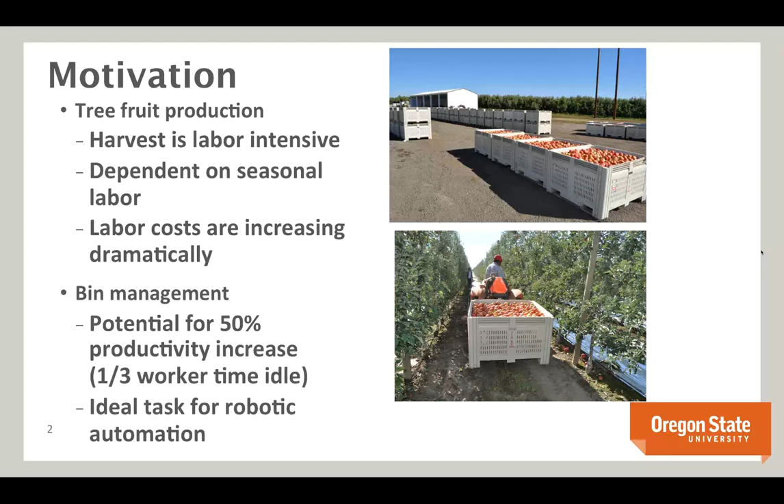So the main goal here from a robotic perspective, and so here's one of these videos that Marcel was talking about. So what we want to do is we want to develop an intelligent bin managing system that is supported by a robotic or multiple robotic self-propelled fruit bin carriers. And so this is just an initial video of the Bin-Dog platform. Let's play that again, turning into a lane.

And so here you see this is a robotic vehicle that has four wheels. It's a gas-powered engine, and I'll talk more about the hardware as we move forward. But it's carrying along this bin sort of in the middle of the vehicle. It's not like a forklift design, so it is actually a fundamentally different hardware design than the kind of stuff that you see in the orchards today. And it allows us to do a number of really interesting things in terms of modifying the way that we do bin management.

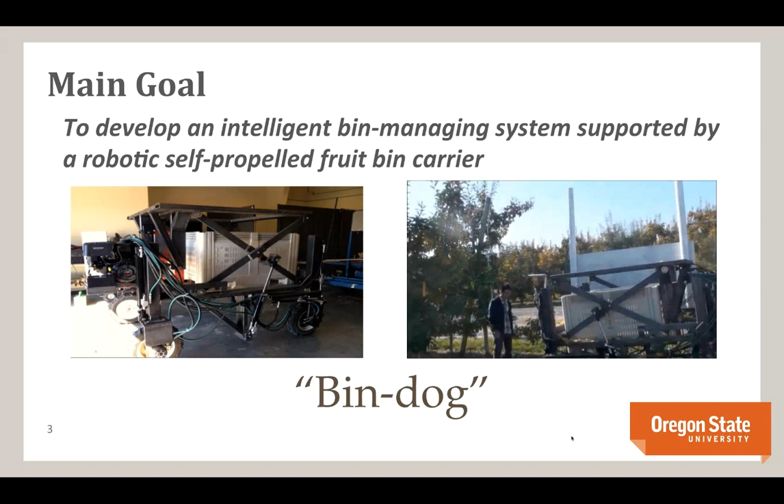And so because this is a collaborative project and this is a robotics project, the technologies that we're developing extend beyond the hardware platform. The hardware platform is very interesting and novel, but there's also more to do in order to get this system up and running and be able to take full advantage of it.

So the key technologies that we're developing are in mechanical design, so that's the platform design, but also in orchard navigation. How do we navigate in these lanes? How do we navigate in these headlands so that we can autonomously move through them and also interact with the growers in a situation where we don't want to cause any kind of danger to the growers or even add stress to the pickers' situation?

So we're looking at in-orchard navigation. We're also looking at multi-agent coordination because we want to have more than one of these bin management robots. If we have very large orchards with potentially hundreds of rows, then one bin manager is not going to be enough. And so we want to think about how do we coordinate multiple vehicles, how do we optimize these vehicles so that we can improve the efficiency of the harvest.

Also looking at human-robot interaction, as I mentioned, how do these vehicles interact with the pickers? Is there something that we can learn about different groups of pickers to try to figure out how to improve this optimization?

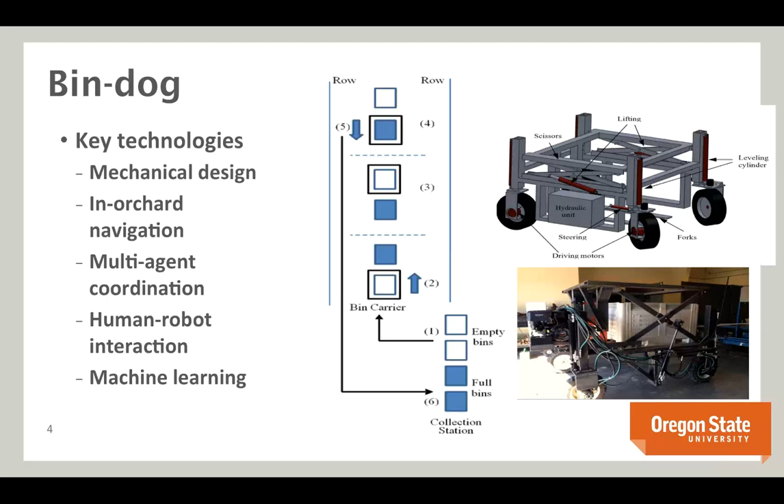So again, getting into how apple bin management is done currently. So here's the current forklift model, just to give you a bit more information about that. So the first step is the tractor will drive into a lane and place an empty bin in that lane. And then once that bin is full, it needs to drive out of that lane. Because of the forklift model, it has to drive out basically the same way that it came in. Can't go over the bin. And then it'll perhaps place some additional bins, and once a bin is full, it will come and pick that bin up and then take it back to the depot station.

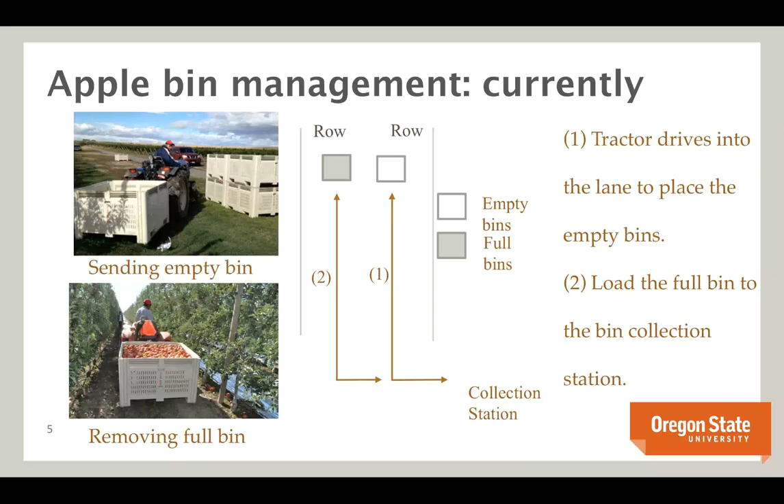And so the kind of tasks that we need to automate here with the traditional forklift tractor: we have empty bin loading, where they're at the depository and want to take some bins out into the field. Half full bin repositioning, which is an interesting one, whether we should take bins that are not full and move them to other places because maybe we've picked all of the apples at that point. And then also full bin transportation. Once the bins are full, we want to be able to take them back to the repository.

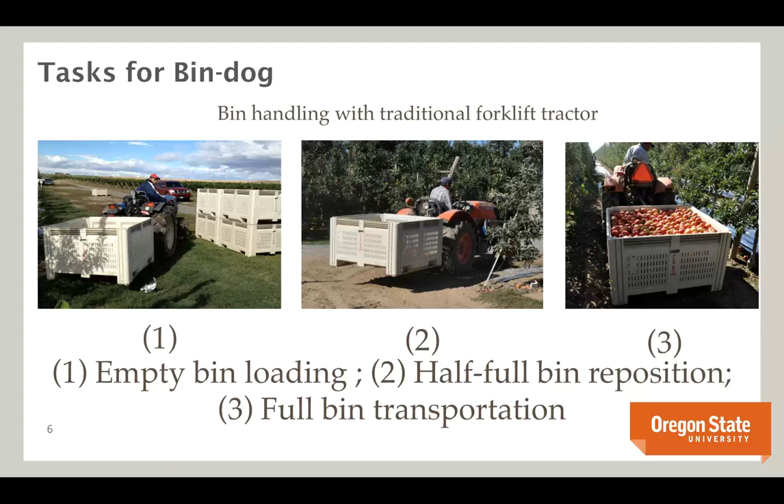So how do we do this with the Bin-Dog autonomous vehicle? Well, what we did was we designed actually sort of a fundamentally different way of doing this. And so the bin management with the Bin-Dog, rather than having this drive into the lane, put the bin down, drive out, and then come back, here the Bin-Dog is actually able to go over the bin. So it's able to drive over full or empty bins so that it doesn't necessarily have to exit the lane the same way that it came in.

So it loads an empty bin in the collection station, drives into the lane until it reaches a full bin. It can then drive over that full bin, unload the empty bin, and drive back to load the full bin. So it can do all of this at once. Basically, it can do bin replacement all in one go at the lane. So even straight off the bat, by redesigning the hardware itself, we're already able to get the possibility of additional efficiency, even without thinking about any of the multi-agent optimization or any of the additional things that we can do with this autonomous platform. So this is the basic idea.

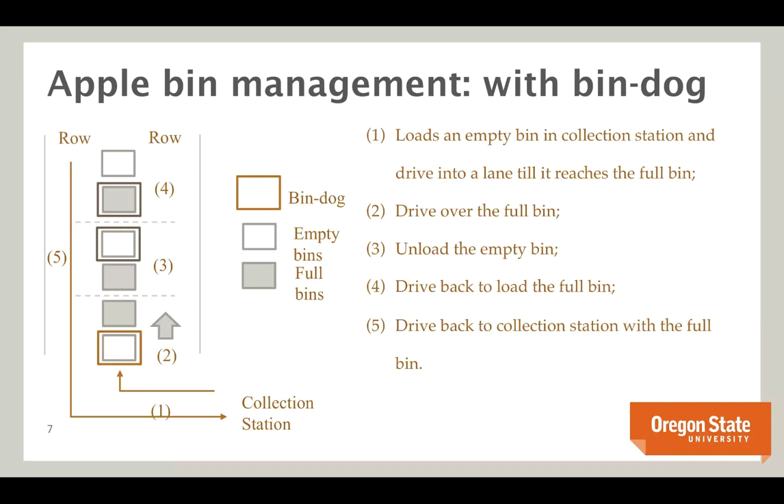And so for the rest of the talk, what I'm going to do is go through the three components of the system. And since there are three PIs, there's a very obvious split in terms of these components. So the hardware design and the system design, that's led by Qin at WSU CPAS. In-orchard navigation is led by Matt Taylor at the Washington State main campus. And then my group is focusing on the multi-agent optimization. And again, this is a highly collaborative project, so of course we have crossover between these different areas. So with that, what I'm going to do for the rest of the webinar is basically go through each of these three different sub-areas of the Bin-Dog and give you an idea of what we've developed here and what we need to move forward with in the future.

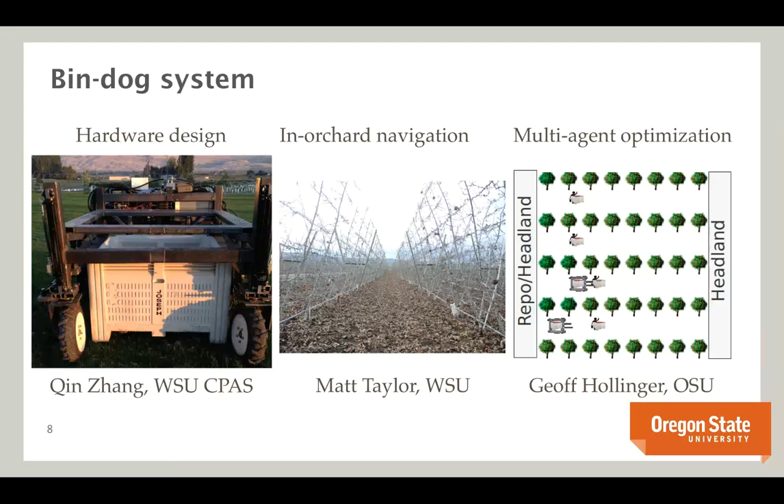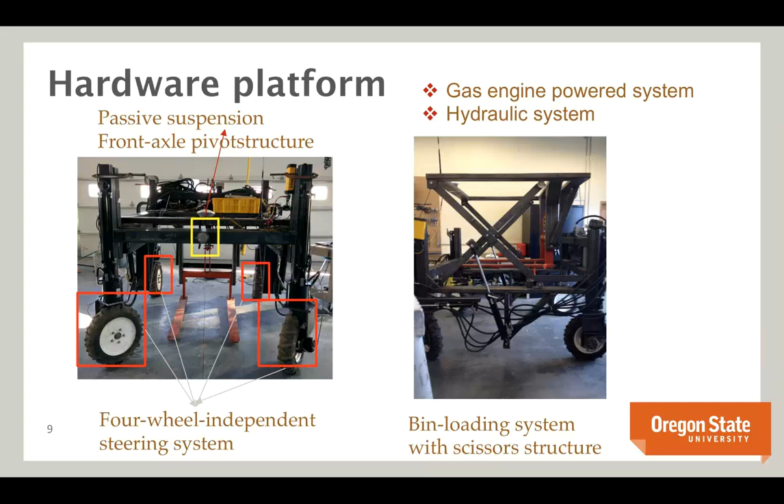This is a gas engine powered vehicle, and it has a hydraulic system for the bin lifting component, and I'll talk more about that. And so the bin loading system has this scissors structure that we'll see more of as we look at a few more videos. So here's the specifications. Basically, it's about a 2.1 meter tall vehicle, so a little bit taller than most humans. 1.5 meter track, 2 meter wheelbase, 9.6 kilowatts of engine power. So this is a fairly powerful vehicle, particularly compared to some of the ground vehicles that I've worked with in the past.

Max speed is 1.2 meters per second, which is reasonably fast. It's perhaps not as fast as a human in a tractor, but because of the advantages that we have of being able to go over the bin, we make up for a lot of that, and we also make up for a lot of that in terms of optimizing the efficiency. And there's also the possibility that we may be able to increase that maximum speed in the future.

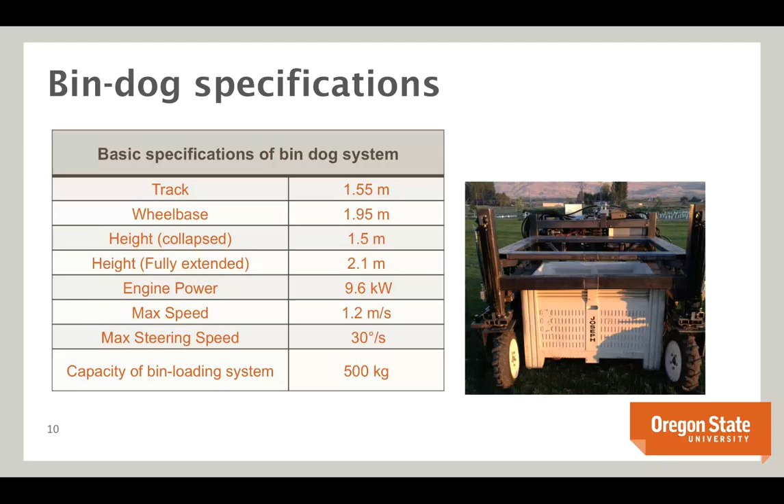Maximum steering speed, 30 degrees per second, and it can pick up a 500-kilogram bin. So these bins are heavy things, but the hydraulic system is designed to handle that. So talking a little bit more about this four-wheel independent steering system that I alluded to earlier, we have 4 different modes that we can operate in on the steering system.

We have Ackermann steering, which is what you would see from a car-like vehicle, so all of us are probably familiar with that. We also have four-wheel coordinated steering, which means that we can actually change the back wheels so that we can modify the pivot point. I'll show you a picture of that in the next slide. Crab steering, where we can actually put the wheels in different configurations, and that allows us to move almost omnidirectionally with the vehicle if we need to do so in very tight quarters.

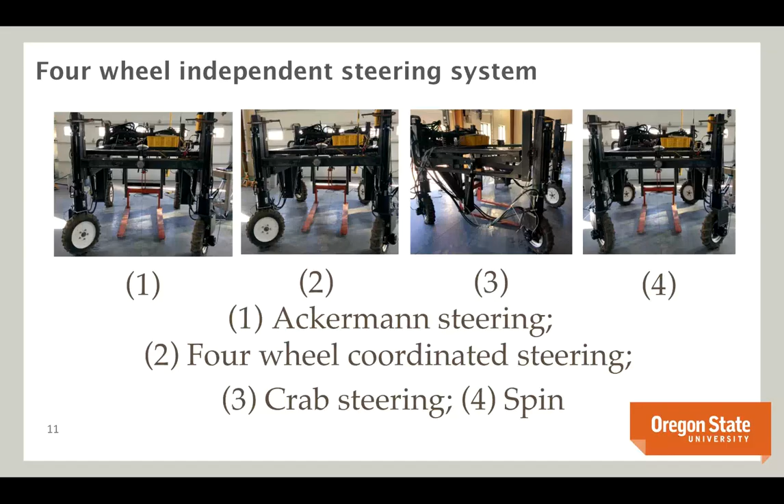And then the spin configuration, where the vehicle can spin in place and potentially reposition itself if it's in a situation that it's not able to get out of with the other steering modes. So one interesting thing here that we've really only scratched the surface on is how do you combine these steering modes intelligently in the navigation system so that you maximize your navigation efficiency, and that's something that we're looking at.

So just another visualization of these steering modes for the independent steering system. With the coordinated steering, you can see that you can position those wheels such that they pivot along that point there that is, I don't know if you can see my cursor, but right along basically to the right of the vehicle. With the spinning, obviously you can pivot around the center of the vehicle.

Ackermann steering pivots around that point that is perpendicular to the back wheels. And then with crab steering, you can really move in a number of different directions if you so desire. So this is a really interesting design here, and it really is beneficial for these orchard environments where you sometimes run into situations where you're in very close quarters.

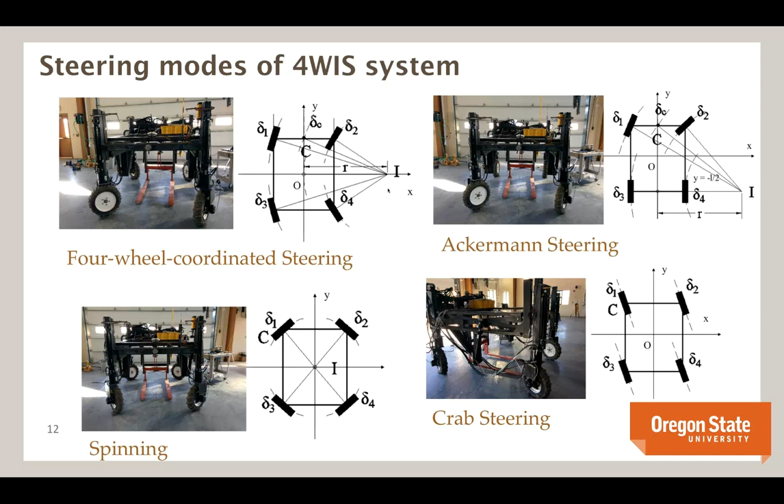So the control system for the vehicle, we allow for both manual and automatic control, so the vehicle can be joysticked by a grower or by a picker or a human operator if that's the mode that is desired. And then we're working on the automated control, and we have some results on that I'll be discussing in the second section. But essentially what the remote controller or the navigation controller do is they go into the same coordinate control system that then feeds into a fairly traditional PID controller on the wheel encoders.

And so we have integrated the laser scanner and IMU and GPS technology into this navigation system, and that basically goes into the estimation portion. But that is at a different level, which I'll show the diagram later, than this coordinated control system, which basically allows us for both manual and automatic operation, which is something that was definitely a priority when we were designing the vehicle. So let's take a look at a field test here.

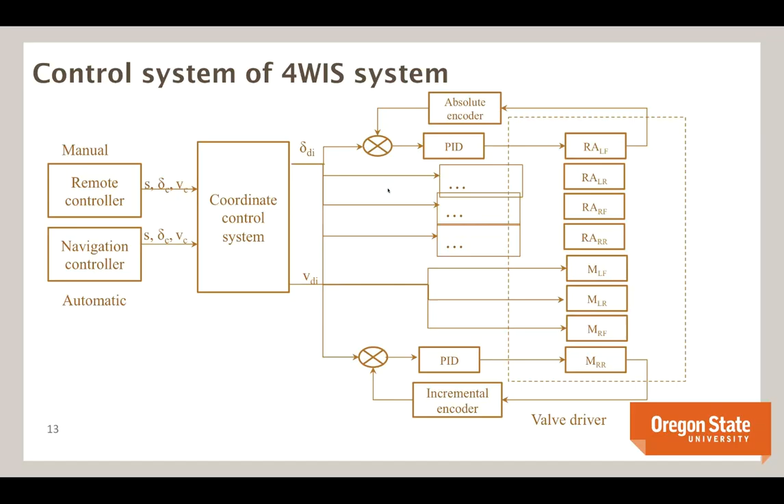And so I'll play this video a couple times since it moves through things fairly quickly. But so here we have spinning mode. It's now entering the lane. This is all under manual control. And you can see how the vehicle is able to enter the lane, drive over a bin, then move to the other bin, place that bin down, and then load.

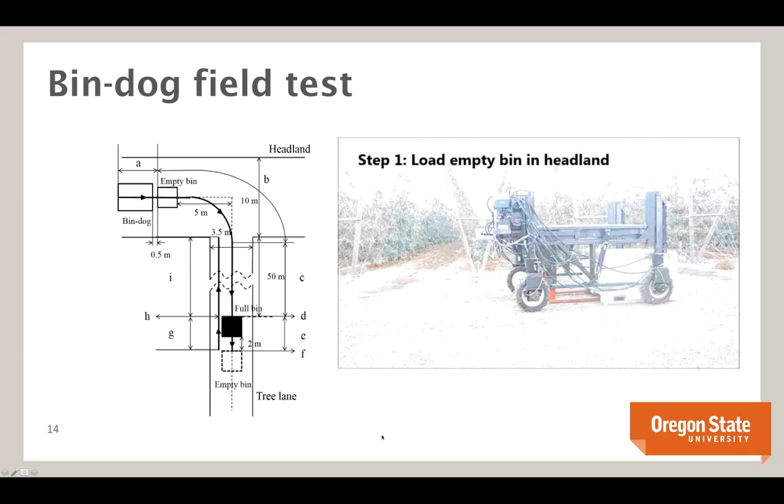So you can see how it is now then able to drive back over there and then pick up this other bin all in one pass of the lane. And so this is not something that you're able to do with the forklift model. So let's just see that again. So loading the empty bin in the headland, entering the tree lane using one of its navigation modes.

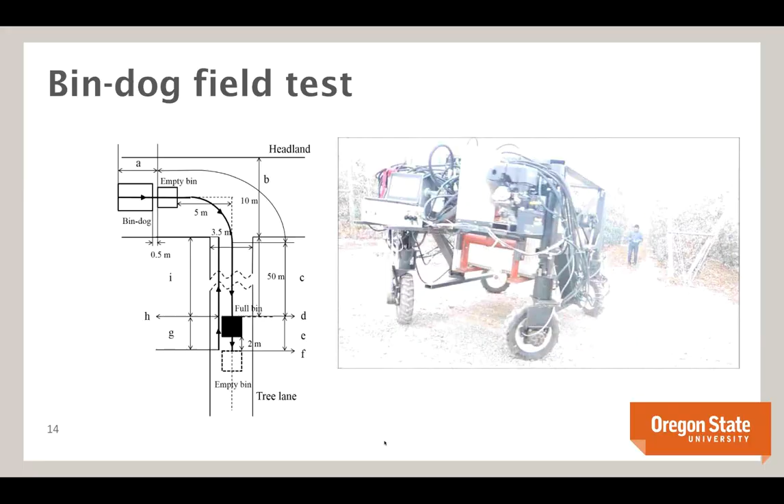You can see the gas-powered engine there on the back and also the onboard computing, though obviously in the final prototype we'd want to have that be more contained, but this is just an experimental platform right now.

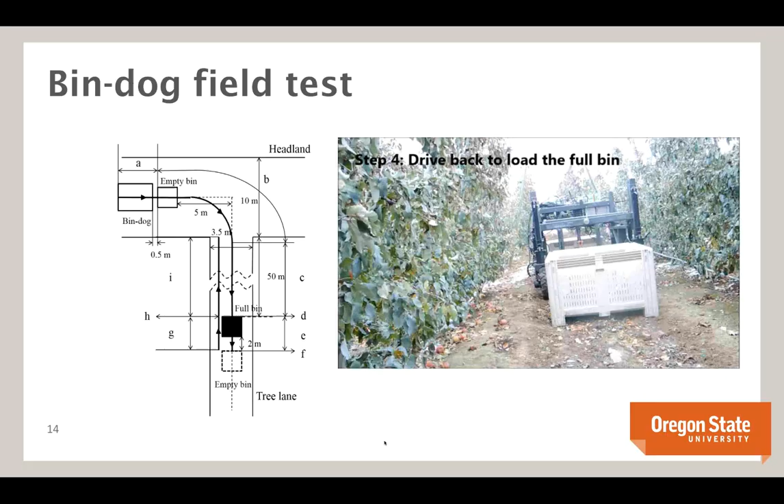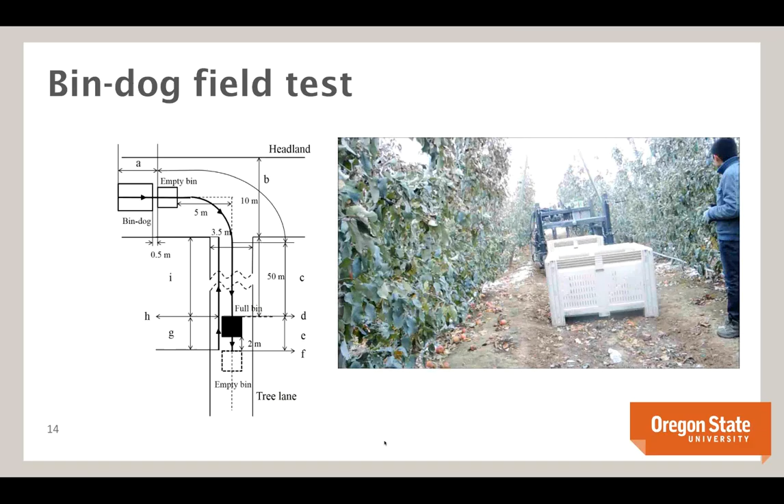Here we see where it's able to lift that hydraulic system up to move over the bins, which is really, really quite a neat and interesting idea, and then basically pick up that other bin. So we basically get this sort of full bin management system going on without having to do multiple passes at the lane.

So the navigation system itself, we also have GPS and IMU. We've also integrated laser scanners into this system as well. And so with the GPS and the IMU, we're able to do pure pursuit to do navigation. So if we have a trajectory that we'd like the vehicle to follow, we can decide whether we want to use Ackermann steering or the coordinated steering or any of those steering modes. And then the controller will be able to follow that trajectory.

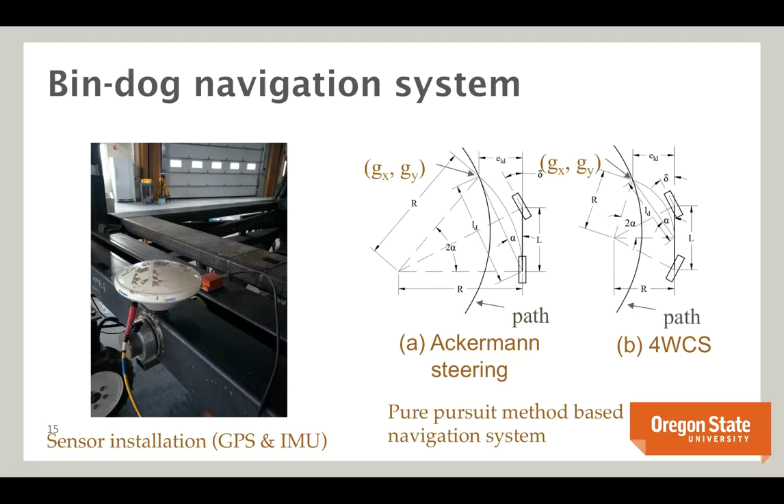And so what we did recently was we ran a number of trials to characterize the navigation performance of this vehicle in real orchard environments. So here's some path tracking performance where the vehicle is navigating in the headland. We do a number of curves with different offsets, so 5 meter, 6 meter, 7.5 meter, and 10 meter offset curves. You can see those on the different images. And then we execute those, and with the GPS and the IMU in the headland, we're able to get a pretty good idea of how well we've executed those curves in terms of testing the controller.

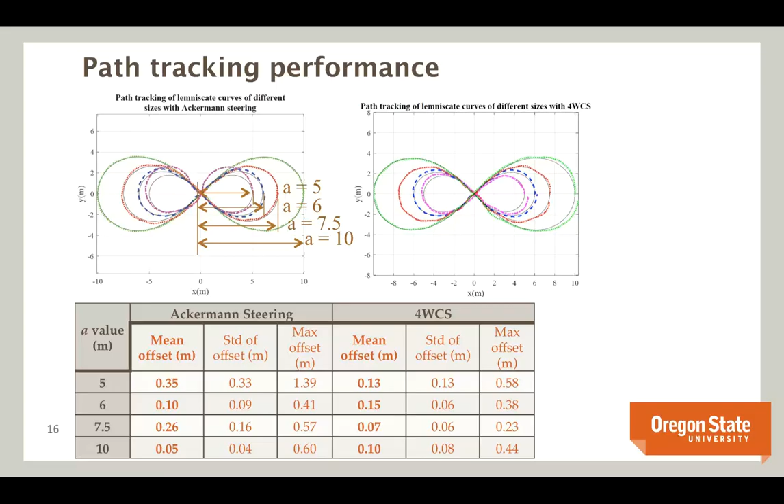And what we see is that we get our offsets with the Ackermann steering for the tight curves about 0.4 meters, and then a little bit lower for the larger curves. Then with the coordinated steering, we're actually able to get lower values. So our mean offset in terms of the trajectory is now reduced to about 0.15, or even in some cases below 0.1 meters. So this is a fairly nice precision controller in terms of being able to maneuver and track these trajectories intelligently.

And so one thing that's really interesting about this vehicle that we've only scratched the surface on is how to combine these steering modes. So if I'm trying to do something like this 90-degree turn where I start at point A and take a sharp left, if I just use four-wheel coordinated steering and I'm turning into a tight lane environment from the headland, I have to do this little overshoot so that the vehicle then comes back into the lane without running into the sides of the lane. But I can combine multiple steering modes to reduce the space requirement and navigate in more crowded orchards.

So if I use crab steering to move from A to B and basically get on this trajectory, I can then use Ackermann steering for the easy part, spin, and then end with Ackermann steering again, and the vehicle will give me a tighter following of this trajectory. And this was an actual trial that we ran on the vehicle. Something that we're very interested in, and we haven't quite figured out how to do yet, is how to automatically determine between these modes. That's actually a motion planning problem that is sort of future down the line.

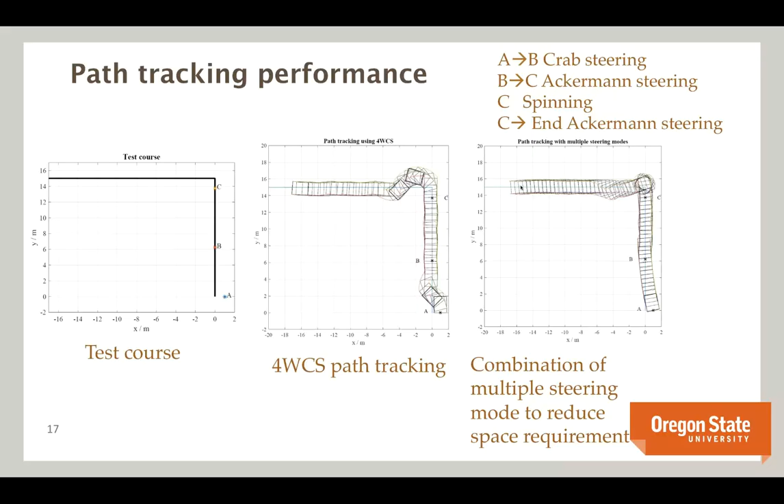Okay, so also just to give you an idea of how long it takes for this vehicle to actually pick up these bins. Under manual control, looking at the bin loading performance, in the headland where you obviously have more space, so things are easier, you can pick up the bin in about 14 seconds. And in the tree rows, you can pick up the bin in about 22 seconds. What we would like is for the autonomous system to get performance similar to what we can do with manual control. But this is fairly reasonable in terms of time periods for standard bin management in the orchard.

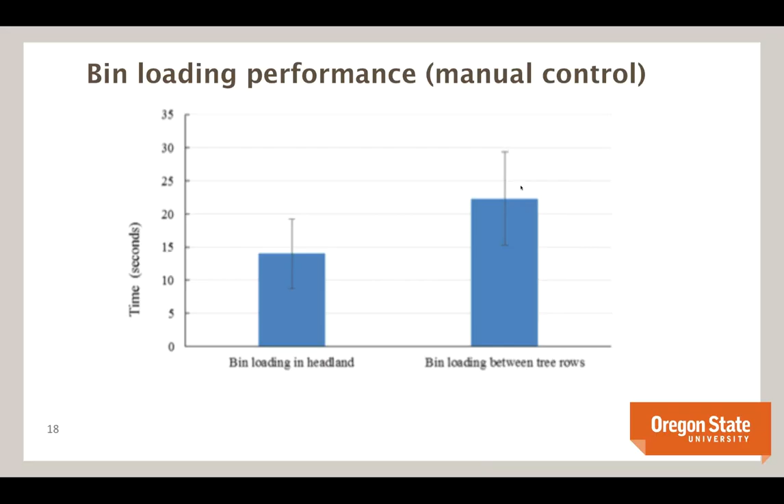So with that, I'm going to move on from hardware design and what the hardware in the vehicle can do, and now talk a bit about in-orchard navigation. This is the case where rather than trying to follow some predefined trajectory, assuming that we have GPS and IMU, when we go in the lane, we run into more cluttered situations where there could be GPS dropouts and we really can't rely on that global positioning system to do the navigation.

So we need to think about the types of systems that roboticists are more familiar with in order to do these kinds of in-orchard navigation. So the system architecture for the navigation system, we use Robot Operating System, or ROS. So we're able to leverage all of the control, estimation, and motion planning capabilities of ROS. That navigation control goes to that low-level controller that I talked about at the beginning, and then gives you basically runtime feedback on what the vehicle is doing.

We have GPS, we have laser, we also can integrate ultrasonic sensors and bring that sensor data back to ROS. And then the ROS does not interface directly with the mechanical system, but it does interface directly with the sensors. And then that low-level control system is what interfaces with both ROS and the mechanical system. And so this was a very deliberate design decision because we wanted to allow for that manual control component if we wanted to take out the autonomy of the system.

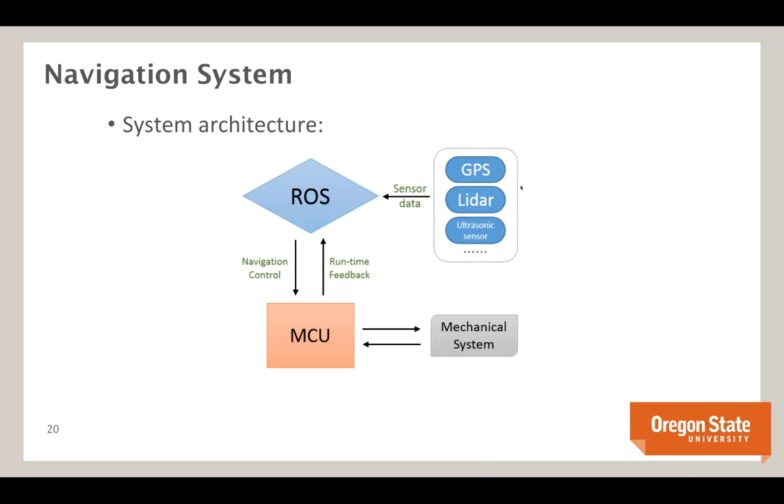So just last month in February, we went down to the orchard and we looked at: can we do laser-based localization? What kind of accuracy can we get with laser-based localization in these tree rows? And so this is actually a more difficult situation than you would typically run into during harvest time, because as you can see, the trees don't have a whole lot on them in terms of leaves or fruit. And so what we want to do is see, well, can we do localization within these rows? How good of an estimate can we get of the vehicle's position if we're trying to basically operate in these more challenging environments?

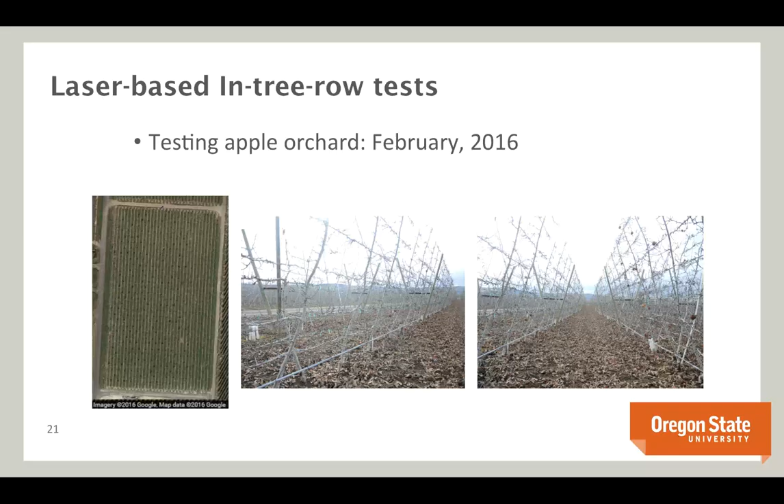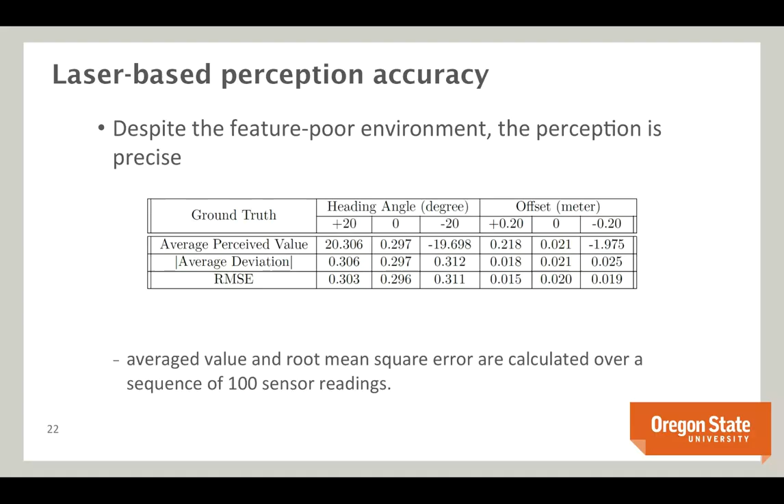So we'd also like to see how accurately we can track a trajectory when we are using this navigation system. So now what we want to do is we have the situation where we are GPS denied, we're in the lane, and we want to be able to drive straight down that lane, obviously without running into the sides of the lane, but also to maintain that center track as much as possible. So our heading angle is basically how far off of 90 degrees we are, and then our offset is that center point of the vehicle, how close does that come.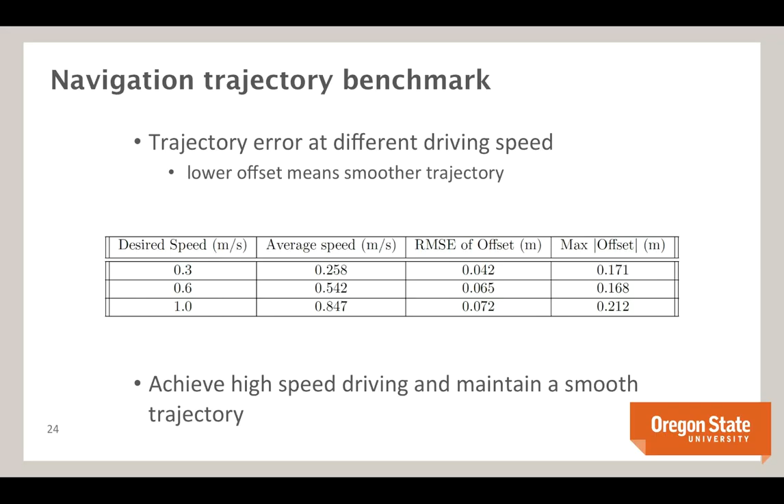So looking at the steering mode integration, we have been able to integrate multiple steering modes to smooth this trajectory. This is something that I alluded to earlier. Here we have the blue line where we're using both Ackermann and Crab steering combined. And then for the green line, we're using just Ackermann steering. And the decision to use Ackermann and Crab steering here is made by the system, but it basically uses Crab steering if it gets far off of that center line position. So there's a threshold there. So this could be done potentially more intelligently even than this. But you can see that by combining those steering modes, we're able to smooth out some of those outliers.

So particularly that big position error there at about 20 meters, we're able to smooth that over by taking advantage of the different steering modes of the system.

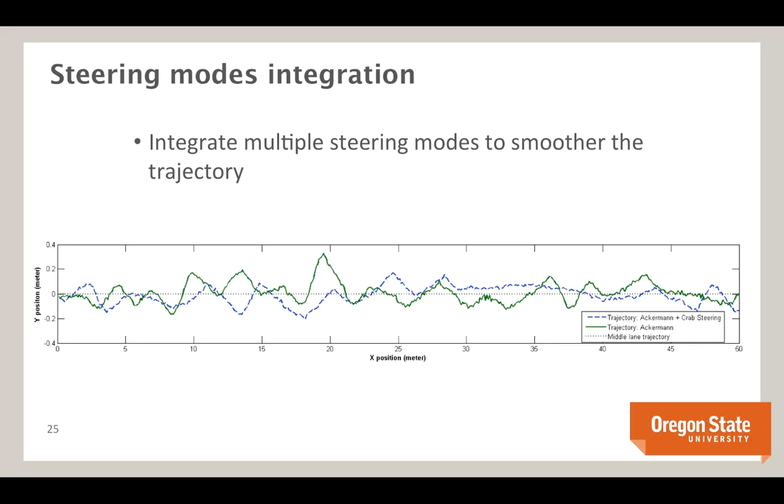So another autonomous requirement here is to actually find the bins and track the bins in order to be able to precisely move over them. And so in order to do this, we need to be able to do bin tracking to about 0.1 meters. That's about the tolerance that the vehicle has in terms of whether or not it can kind of bounce that bin around to the point where it'll get on the hydraulic component.

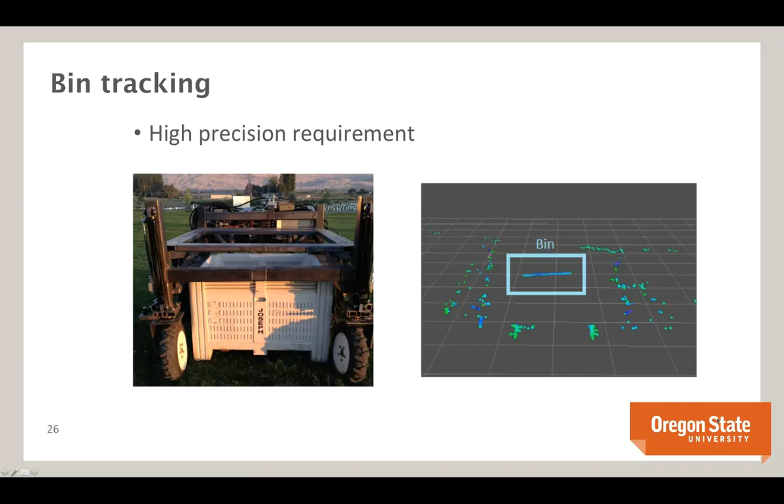And so our initial trials showed that we could just use fairly simple techniques like Hough transforms, because the bin comes out very nicely in the laser scanner as a line in the middle of the orchard that is perpendicular from the lane. So using fairly simple computer vision techniques, we're actually able to get that level of precision that we need.

So again, in these tests, we have the bin model identification. It does appear to be fairly robust, and we're looking at bin tracking errors that are less than about 0.1 meters, and that's our baseline in terms of what we expect to be able to do to be able to pick up that bin. And so we have picked up the bins autonomously at this point, but we have not yet done the trials to figure out how robust that bin pickup is. So that's one of the things that we have going on down the line.

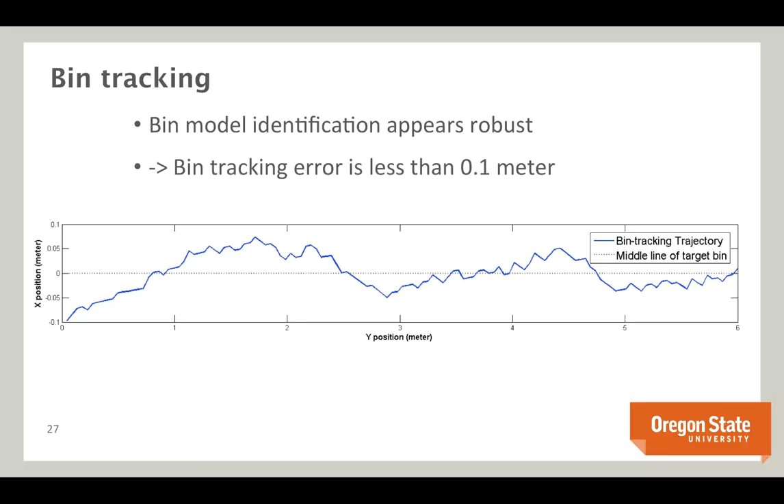I should mention that we've completed about 1.5 years of this project, so we're about halfway through the 3-year National Robotics Initiative project. Okay, so that brings us to the point where we've talked about the hardware design and also the in-orchard navigation system that takes advantage of the laser-based localization.

And so the last component of the talk today is the multi-agent optimization, and this is what my group has been working on. And what this basically is saying is, let's look ahead. Right now we have one bin-dog prototype, but if we have multiple bin-dog prototypes within one orchard, can we coordinate them in such a way that we will optimize the bin management and improve this efficiency? And so this is sort of a use case test of what kinds of performance we're going to be able to get once the system scales up.

So here's the simulation environment that we developed. It's still fairly small, but the methods that we're developing are scalable. This was meant to be sort of a representative test case for a fairly small orchard within the Prosser environment. So we have 10 trees and 5 lanes. Workers average about 2 minutes to finish one tree, and that's from real data from real pickers. The robots move about 0.5 meter per second when carrying a full bin and 1 meter per second otherwise. This is based on the actual values of how fast the bin management robot moves.

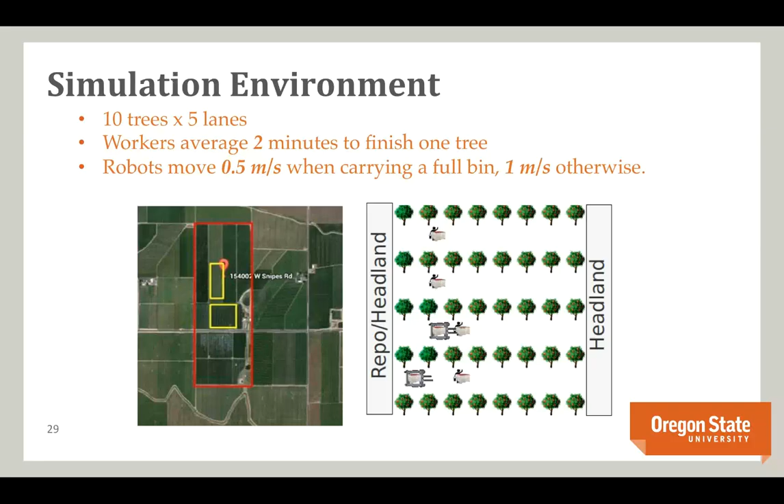And so what we want to do is we want to be able to optimize where these bin dogs go to pick up these bins and to manage the bin management in this orchard. So the setup is we have groups of workers that are initialized at the beginning of the lanes in the headlands. If there are no more apples, then the workers will move to a new location and they'll request a new bin from the vehicles. Here we're assuming that the vehicles know where the bins are at all times. This could be done with RFID or a wireless network.

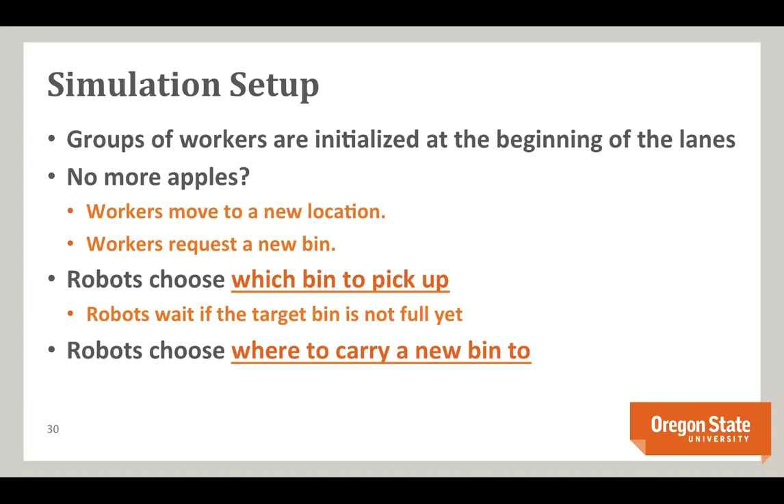The robots choose which bin to pick up, and they wait if the target bin is not full yet. And then the robots choose where to carry that new bin to, and typically that'll be to the depositing station if the bin is full. So we looked at a couple of different algorithms for doing this. The first algorithm is a fairly naive, greedy algorithm where there's no coordination between the bin dogs. And so here the bin managing robots will just choose the closest full bin or the earliest requested location.

If there is no full bin, they'll choose the bin that they think will be filled the fastest, and then wait for that target bin to become full, and then take it back to the repository. And so there's no priority scheme here. Other robots cannot see these bin requests, and so they can't manage the requests. And so this leads to some inefficiencies in the sense that we now have the bin dogs waiting, rather than going to a bin that could lead to a more efficient strategy.

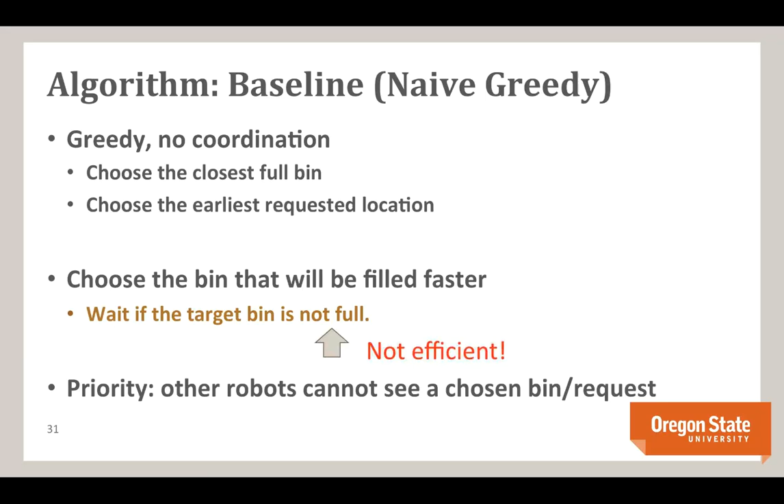So what we developed here was an auction-based method, and it's designed so you can run it in either a centralized or a decentralized way. We may not have guarantees on full communication in the orchard at all times, so we may need to have a decentralized approach, but this method will work whether you have a centralized auction or a decentralized auction.

And so the robots coordinate through this auction, so each robot makes plans to pick up the bins in the orchard, and that plan cost is represented by the time required to reach that target bin plus the time required to wait for the target bin to be full. So both of those components are taken into account, and essentially what the robots are doing is bidding for that bin task. And then the bin dog with the least cost wins the task and is able to then go and proceed to pick up that bin.

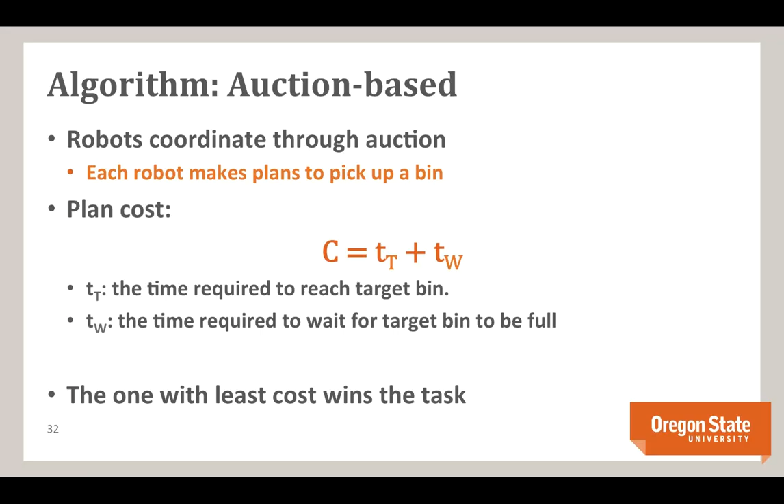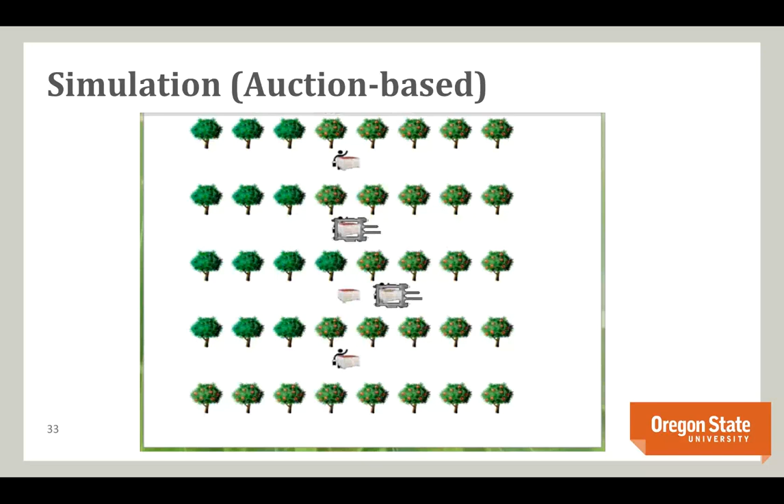So these are definitely very encouraging initial results, and I'm excited to see what we can achieve if we have multiple prototypes in the orchards and basically save these growers money for the bin management task. So that's most of what I wanted to talk about today. We hit the hardware design, the in-orchard navigation, and the multi-agent optimization components.

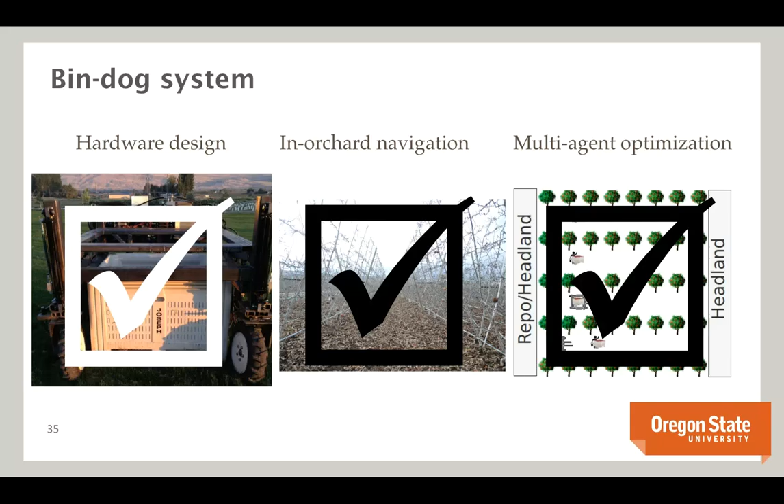For the next 5 minutes or so, I'm going to go into some of the challenges that we're looking at now and the future directions that we have on this project for the next year and a half and potentially beyond if we continue this line of work. So the next steps in terms of navigation: one of the issues is speed limitations on the current platform, and that's a hardware limitation. It certainly would be beneficial to have the vehicle move more quickly.

This ties right into the safe operation with humans. If we have these fast-moving autonomous vehicles moving with the pickers, this could potentially lead to injuries and hazardous situations. So all of the issues that folks are looking at in robotics in terms of robots operating in human workspaces really come into play here as well, which was part of the tie into the National Robotics Initiative.

Here was that idea of safe operation with humans. Low-level control of the steering modes, or automatic control of those steering modes, trying to decide which steering mode to use to try to improve that efficiency.

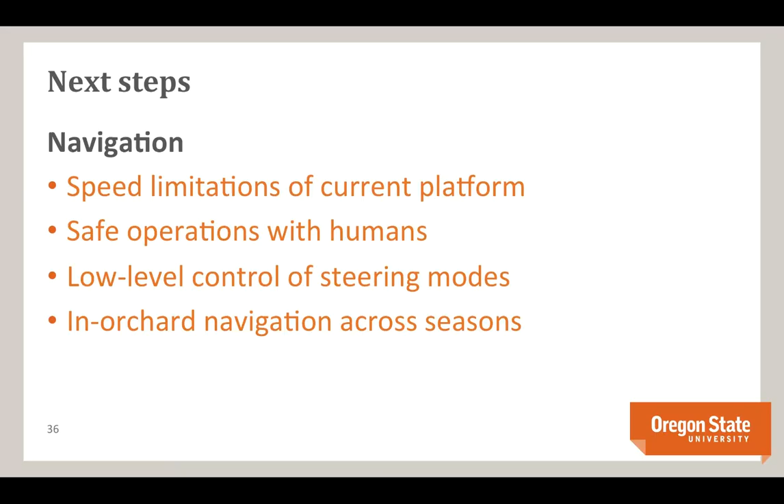And then also the idea of how does the perception change across seasons. So if you're doing harvest time, really this system is designed for harvest time, but if you need to navigate in the orchard in non-harvest time, are there differences that you have to make for the navigation system? Can you use the same techniques depending on how the lanes look? And so what that can help us move towards is more robust navigation systems for different kinds of environments.

On the multi-agent optimization end, we can think about a few different extensions there. So the idea of moving semi-full bins to optimize performance, that's not something that our current approach does. Now we tried doing that, and what we found is that we weren't really able to get very substantial gains in efficiency by moving those semi-full bins. And so there's some question as to whether or not there's really a lot of utility in that, because obviously it takes time from the bin management robots. But if you had a large number of them, then there could potentially be benefit from that. So that's something that we're looking at.

Also, this big question of how to balance the workload to make sure that vehicles are not waiting and that all of the vehicles are doing effective bin management at all times. That's something that we would certainly like to deal with. There's also the matter that workers work at different speeds, so is there an advantage to learning how quick some of the pickers are, relaying that information to the robots, and having them change their bin picking strategies based on that? That's something else that we're looking into, and that might require some additional learning approaches to figure out how to optimize in those kinds of situations.